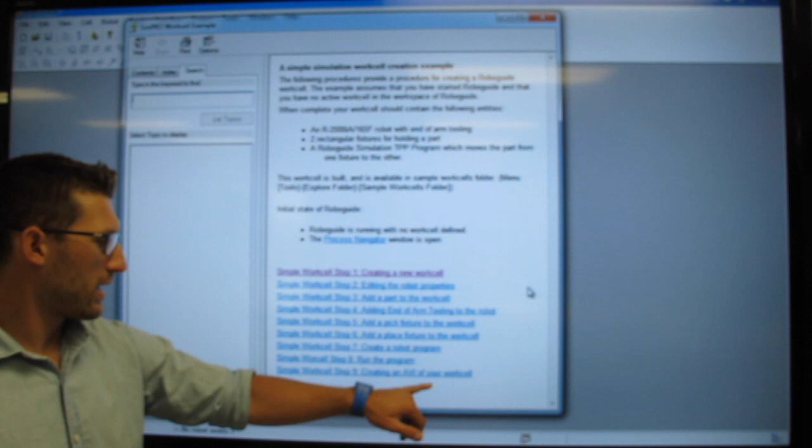Okay, when you first click the Roboguide software and you open, you will be greeted with a menu that's called the Process Navigator. Our Process Navigator is known as such because it gives you 9 steps from beginning to end to create a new work cell, and also all the way on the back end to create a video and share a working concept, proof of concept, or instructional video that you can use at a later purpose.

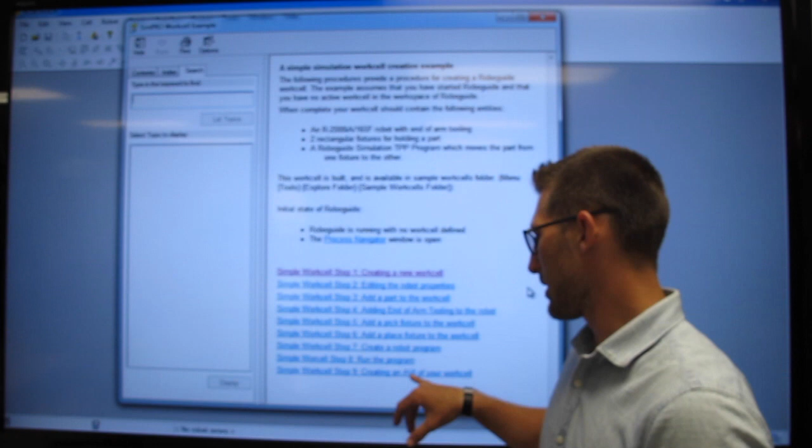As you guys see, it starts with creating a new work cell, editing properties, adding parts to the work cell, adding end-of-arm tooling, pick fixture, place fixture, creating a robotic program, running the program, and then once again, as I mentioned, a video tutorial at the end that would be able to record your process in your work cell working and export it as an AVI video format.

So our very first step is you can choose to walk through these if you're a new user to Roboguide, and you can use the Process Navigator to walk you through and almost give you an orientation into the program itself. But that also is why I'm here in this tutorial, and so I'll walk you through it using our next step, which we will close out of here.

Alright, so you're going to go to File first. When you first look, you're going to see the Roboguide interface, but not a whole lot after that. After clicking File, let's go ahead and set up a new cell. Now we have our work cell creation wizard that comes up. So this work cell wizard will actually walk you through how to create the most accurate and specific robotic work cell for your FANUC work cell setup.

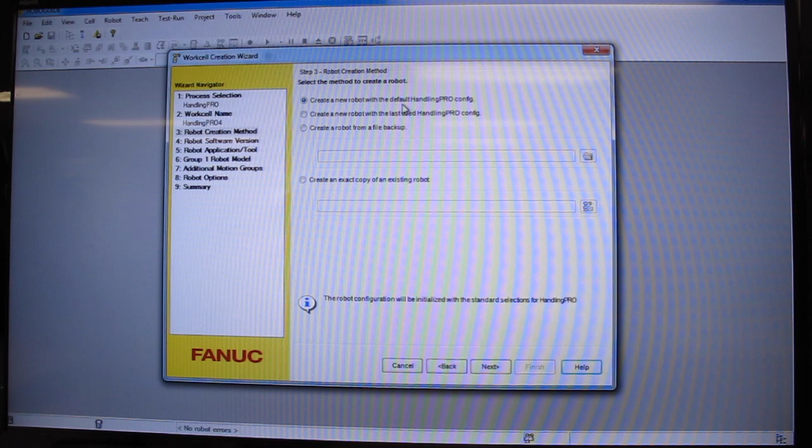We're going to go ahead and click Next. For this demonstration, we're going to use Handling Pro. We're going to create a new robot from the default Handling Pro configuration, your first option here. We are also going to create our R30iB controller version, which will match our robot in the lab.

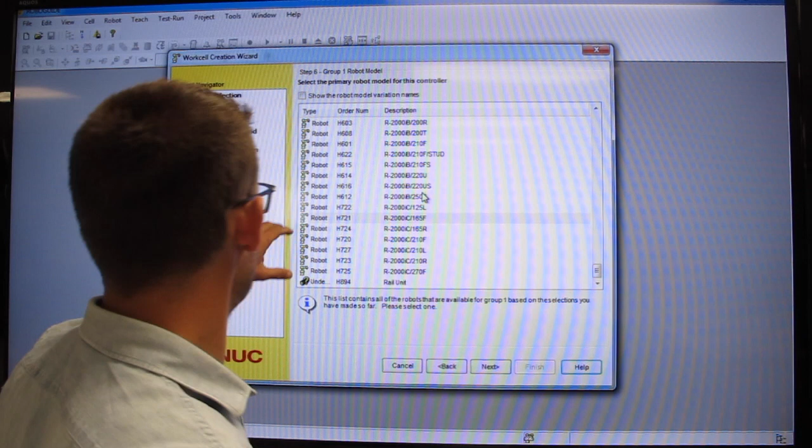Now, in this step in your work cell creation wizard, you're going to see several robotic models here. The closest that we can get is going to be our 1000iA. So we're going to scroll up. Here we go, our R-1000iA right here.

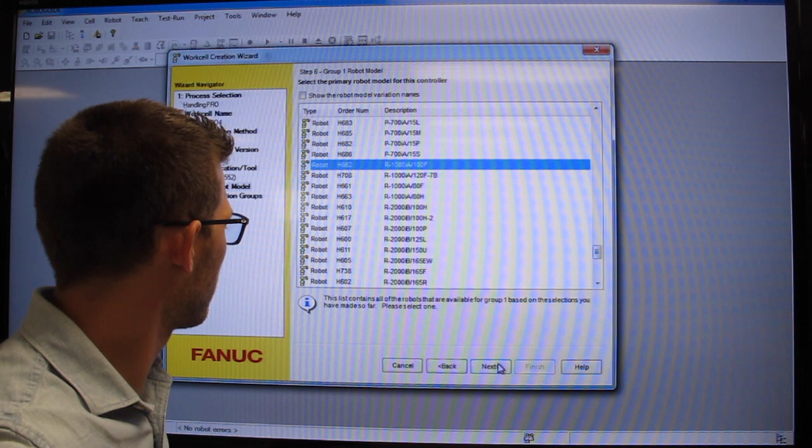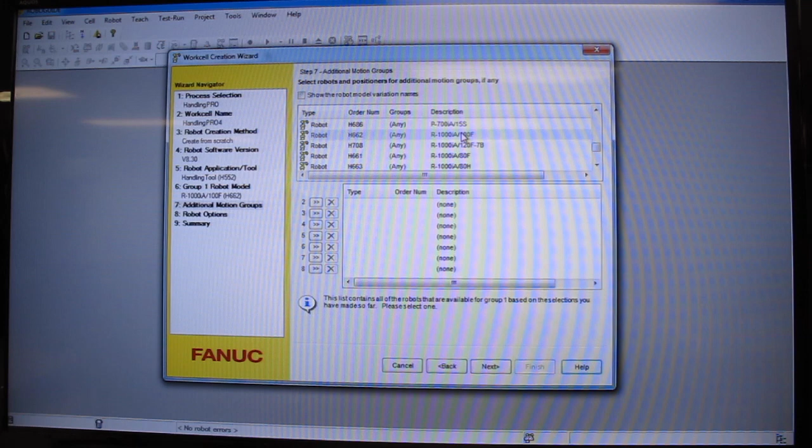As you see here, you have a breakdown of the different positioners and aspects in the motion groups within your robot. These are all the different variations of the robot that you have. And as you see, you can scroll down and see all the different options that you have. And right here is our 1000iA 100F, which matches our specific robot in our lab. Okay.

Now this is an overall summary of the options that you've selected. If you want to make sure to scroll back through these before you click, then you are able to make sure and double check that you have the most accurate setup for your work cell.

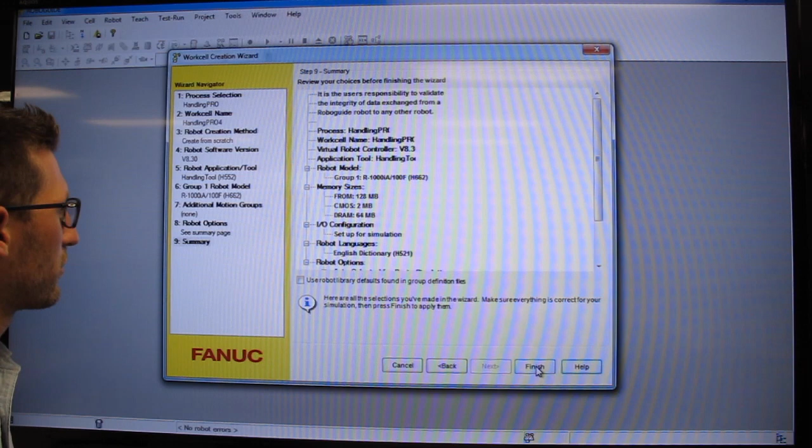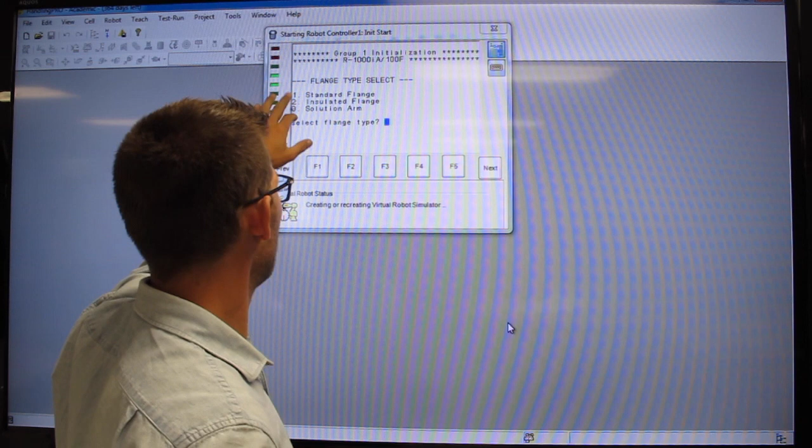So as you see with our init start display here, it will start scrolling, and you'll see something very similar on your teach pendant unit in your physical robot. You'll have a first time startup question that will prompt you. Standard flange, insulated flange, or solution arm. Our flange type is going to be a standard flange.

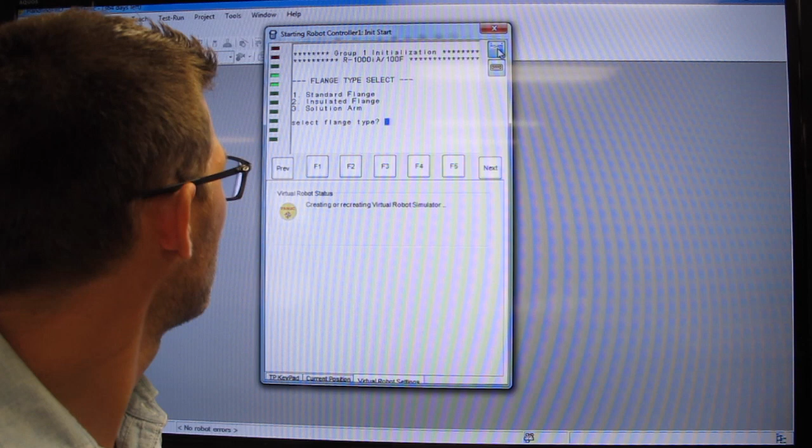Now before we go much farther, you can use inside of the Roboguide interface a keyboard, as in just your traditional keyboard peripheral for your PC, or you can also use a virtual teach pendant keyboard. So if we click our show keypad up here, and then we come down to TP keypad in the bottom left hand corner here, you'll have an option in a small tab. You'll click that, and now what you'll see in front of you is very similar to the teach pendant interface with most of your controllers and physical robots.

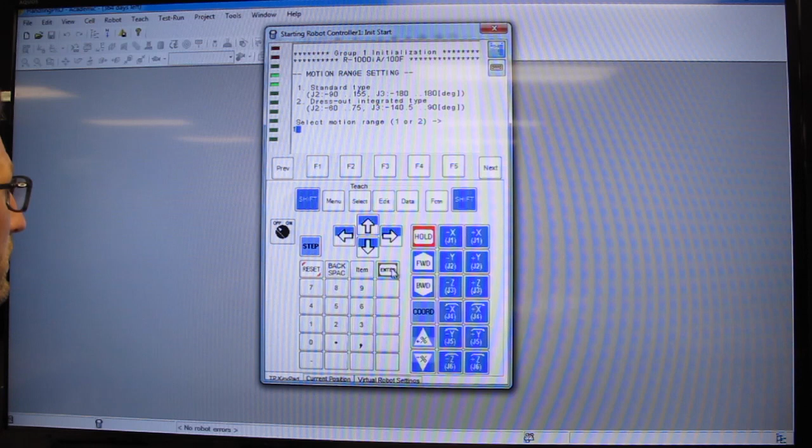So our flange type, we're going to go with a standard flange. Standard type of motion range, I'm going to go with 1. Enter. And then now you see that starting to optimize the setup for our first time teach pendant setup.

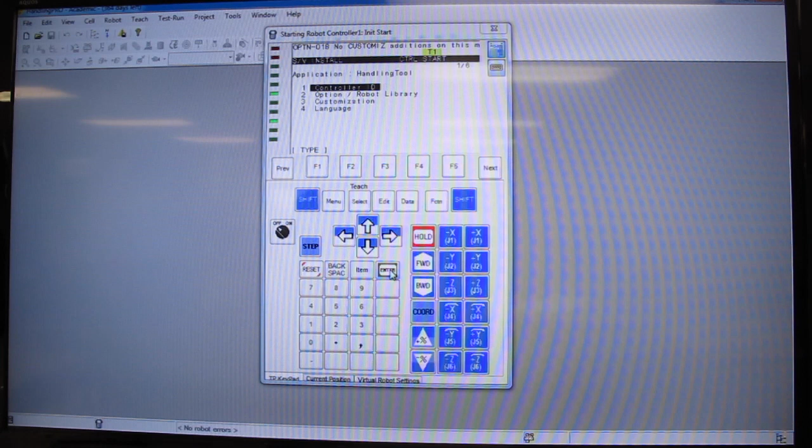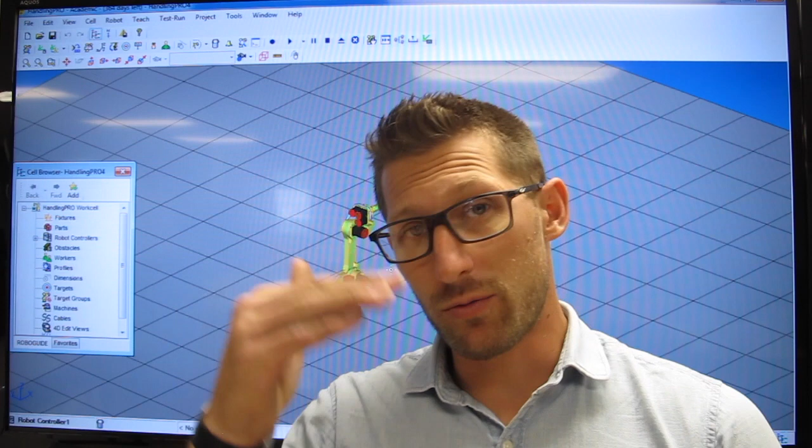After the setup on your virtual teach pendant runs its prompt, you're going to see something that's going to look very similar to the screen right before you. Your robot may differ depending on the options that you chose during your work cell creation process. This looks pretty similar to the one we have in our lab.

So, within this 3D realm, there are a couple of options on how to navigate through this virtual work cell that we've created for our Fanuc robot in our virtual setting. But first we need to kind of wrap our heads around how we're going to orient ourselves, reorient ourselves within this virtual world.

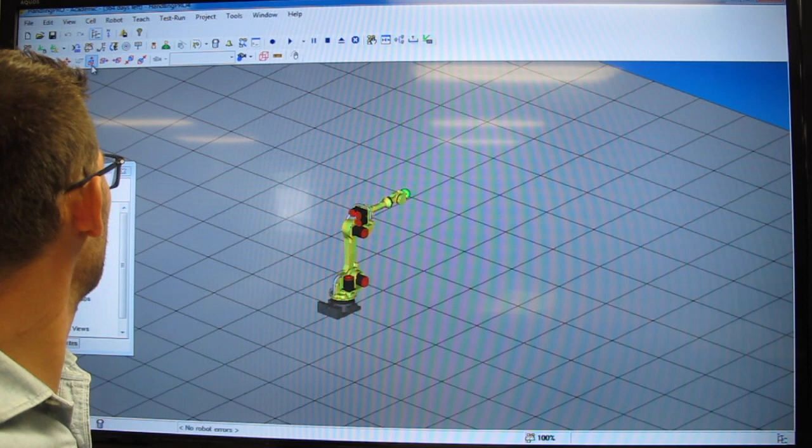If you take a look up here, we have primary world views right here. And you'll see a red arrow indicating which angle that you would like to view your work cell from. Once again, we have a top down, we have a left view, right view, front view, and a rear view. We're going to go back to our left view here just to bring it back.

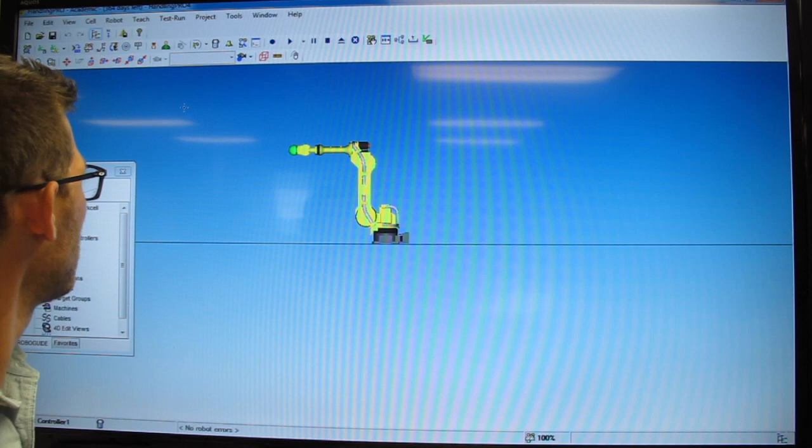Also, with a quick mouse over, it will also give you a description if you get a little turned around or disoriented with just the red arrows on the graphics up in this user interface. So a quick mouse over will explain exactly what these are, but then once again, these navigation settings are the best way to find out where you're going.

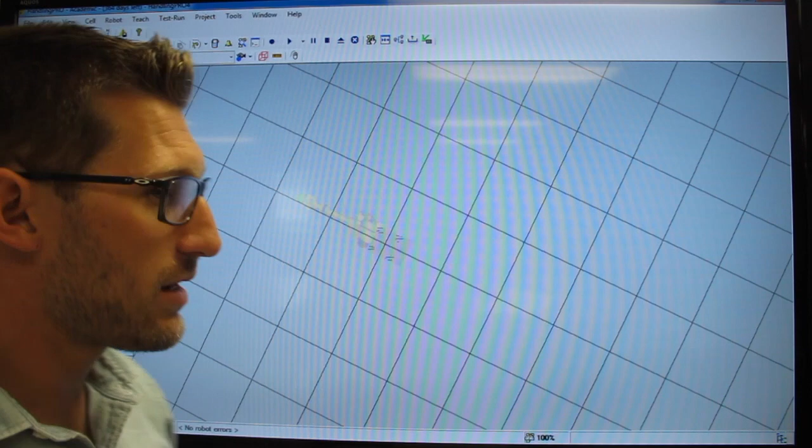If you get really turned around here, let's say something happens here, there is an easy setback, which is the 4 arrows pointing to a center point back over here. And if you click that, that will center your object, and then you can come back and then find your view again.

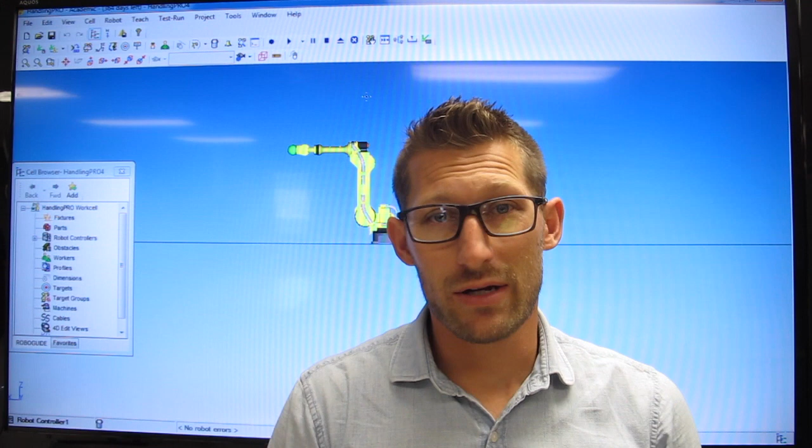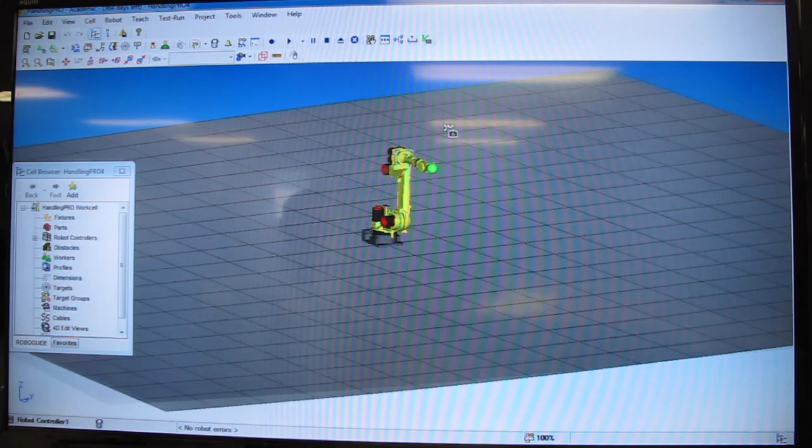There are a couple of mouse shortcuts that you can take advantage of in order to manipulate your view and perspective within our Roboguide software. The first one, and probably most intuitive, is going to be a right click, which will allow you to orbit around your object or rotate around your object. So once again, this is a right click. Your left click selects your object. And so a left click on your mouse doesn't do much as far as orientation or perspective shifting.

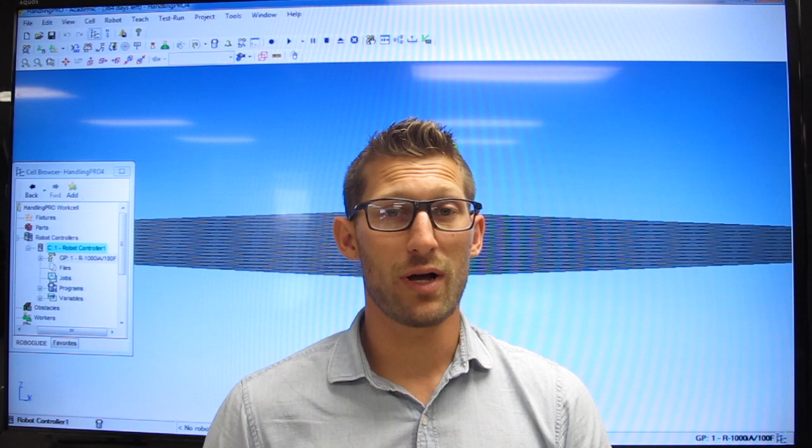But it is absolutely vital when you start creating several different entities and objects within one work cell. Let's say a table, an enclosure, an object that you're going to manipulate or move, along with your robot, or even maybe multiple objects. That's when left click will allow you to choose different objects and different features. But once again, your right click allows you to rotate.

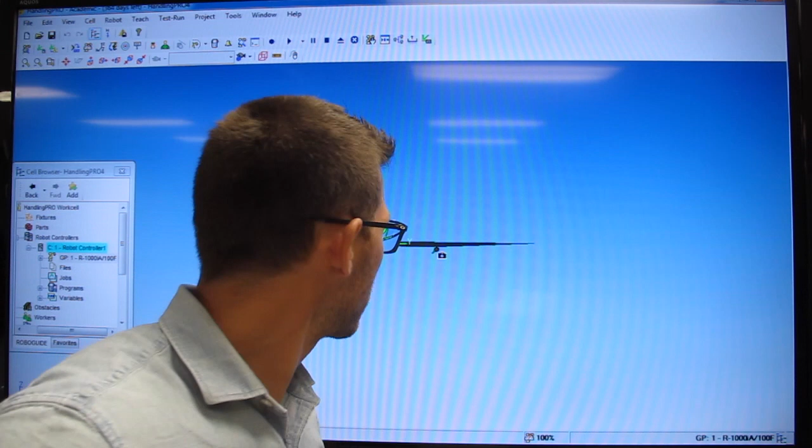As far as zooming in and out of your robot in order to get a closer view in your virtual work cell, you can hold your left and right click and drag your mouse towards you or away from your computer screen. You can push it towards your computer screen and it will zoom back in. This is done once again by holding your left and right click buttons on your mouse.

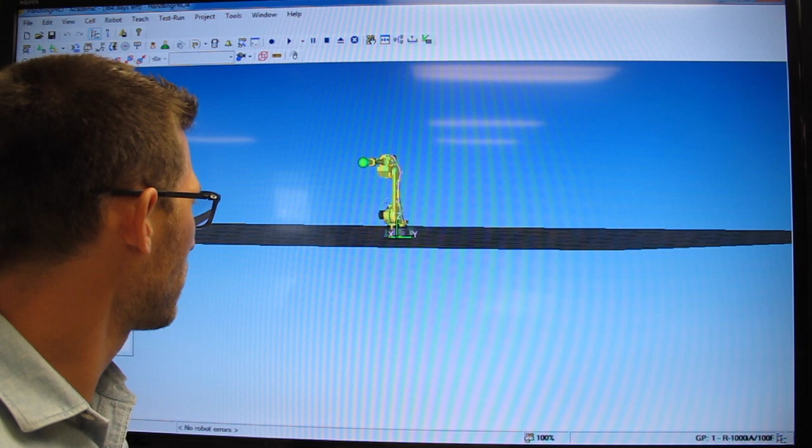If you happen to have a scroll wheel on your mouse, then this makes your job a little easier, as you can just scroll away from the screen to back away from your work envelope, and scroll towards the screen to get a little closer towards your envelope. Once again, for our orientation, we can right click around.

The point of zoom: let's say there's a very specific part of our end of arm tooling that we want to zoom in on. If I just do a uniform zoom in, I'm going to go wherever this arrow is. So if I want to see my end of arm tooling, I want to mouse over my arrow without clicking, and now use my scroll feature.

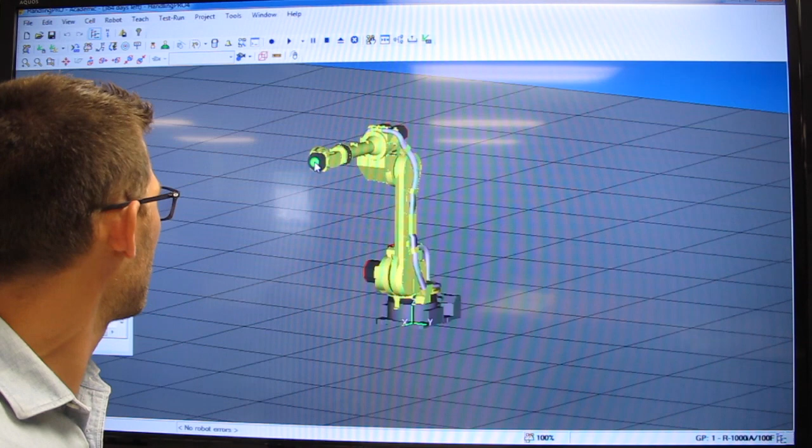And you'll notice that I'm going to scroll exactly where my mouse is mousing over at the time. So this is very helpful, especially once again if you have multiple objects that you're going to manipulate within your virtual work cell.

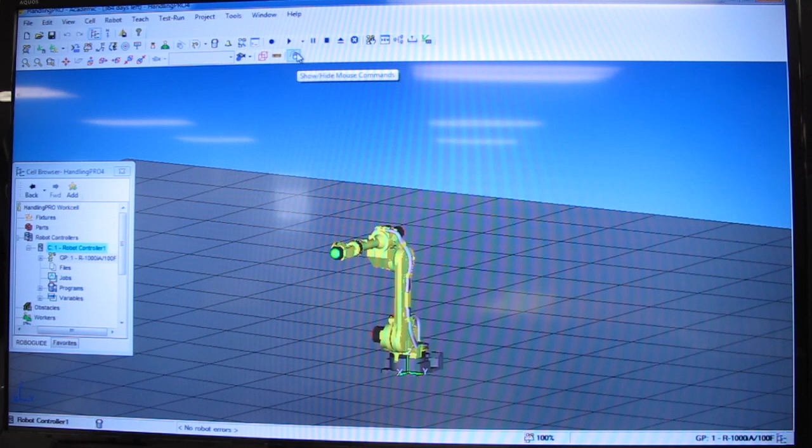And then another kind of a side help that will also really help new users is when you come up to the very top and find this mouse icon in the browser bar at the very top of your user interface and click that, you'll see a 3D World mouse commands shortcut menu.

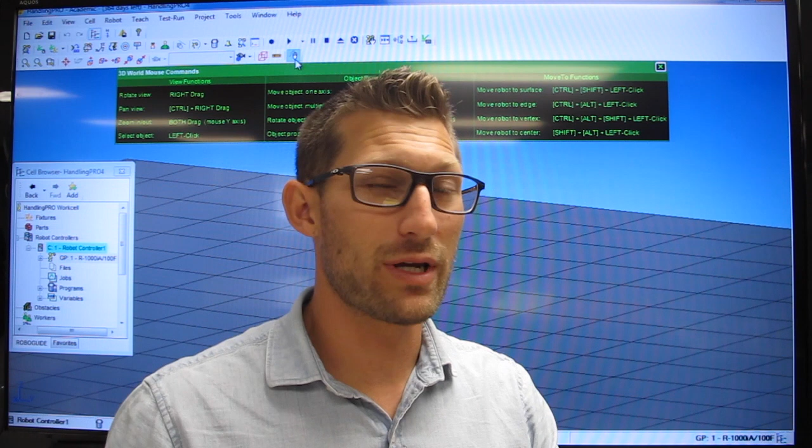So this is almost kind of like a cheat sheet, if you will, that you'll be able to click back to if you ever get lost or forget one of these several commands that are going to make your job a little easier to orient yourself within this virtual world. So once again, we talked about several of these, but we have right drag to rotate view, control right drag to pan view, zoom in and out, both drag, or also a scroll wheel.

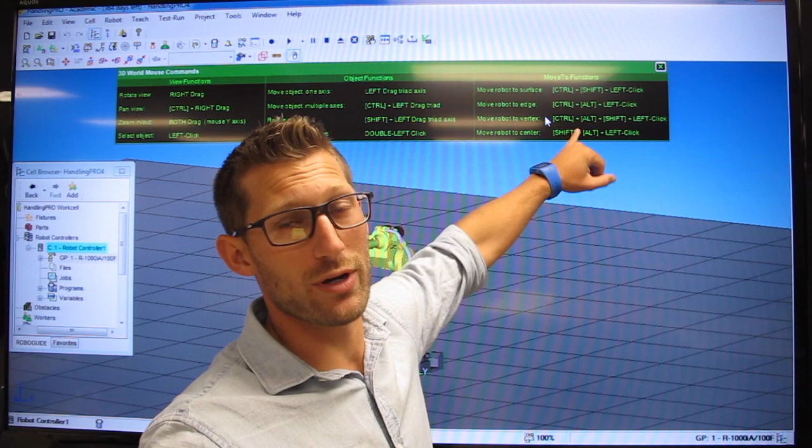We also have our move to functions, and these would be known as more advanced positioning shortcuts within our virtual world. Once again, these are all found by clicking that mouse icon.